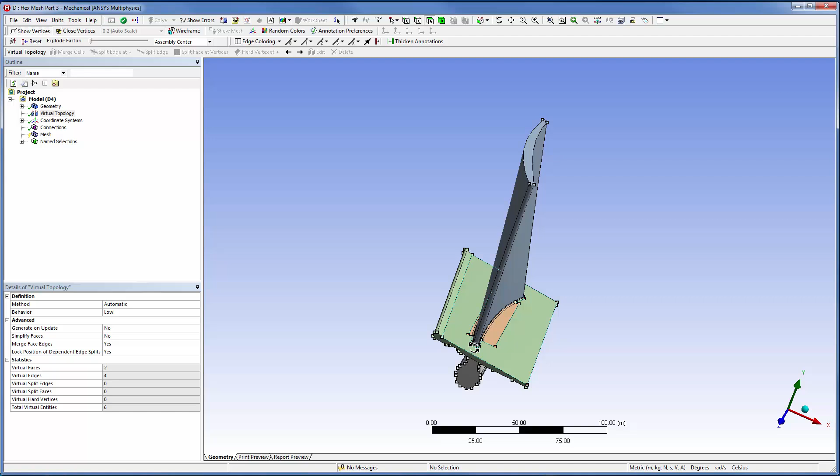There are some fillets on the plate surrounding the blade. When I decomposed the model, I sliced these fillets in half, but now I need to merge them with the adjacent faces on the plate. Doing so will help me get a good quality hex mesh.

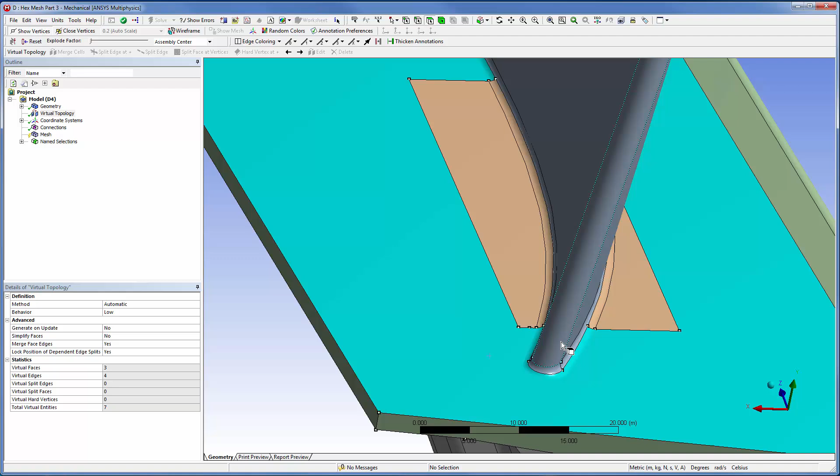The blade also has a couple of fillets, so I need to merge them with the adjacent faces.

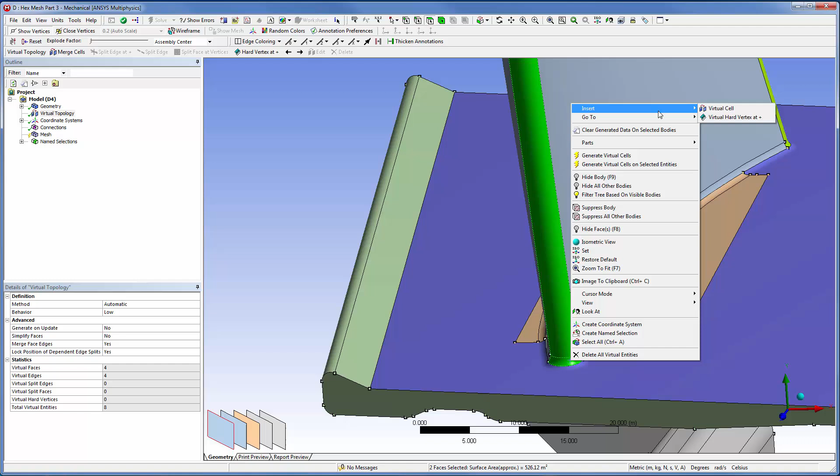Now I can clean up the fillets on the intersection region.

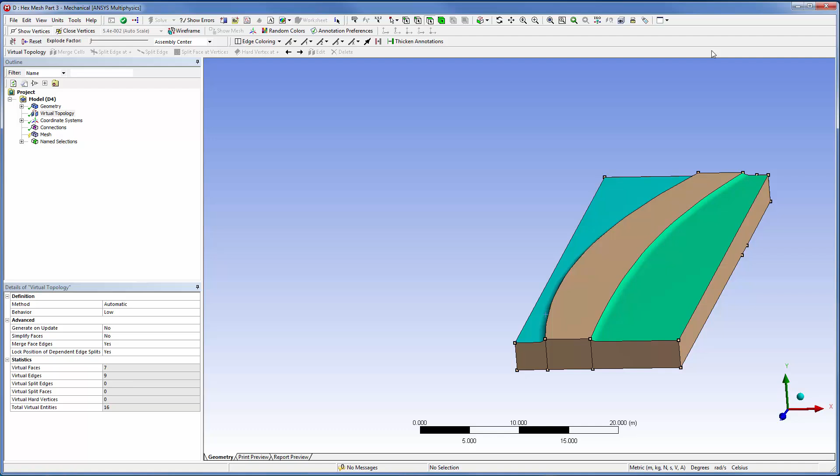There's a split on this face, so I'll merge the two faces into one. The faces were merged, but the edges on the bottom of the face are split. I'll insert a virtual cell to remove the split.

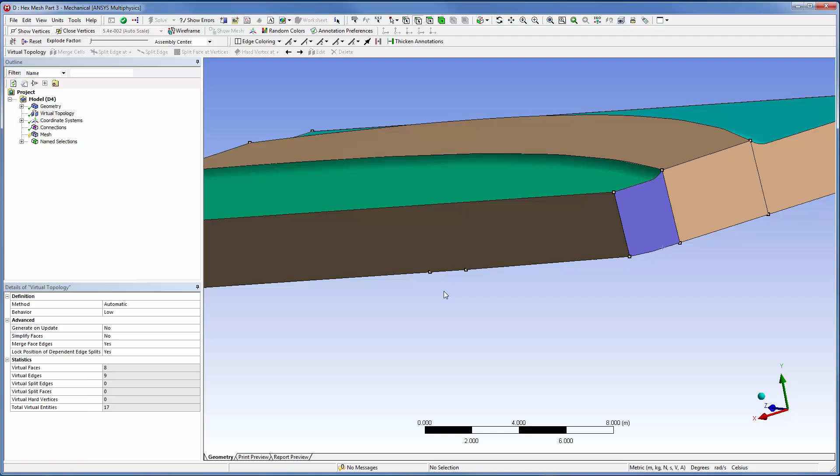There's another edge split on this side of the body. I'll insert a virtual cell to remove it.

If I show sweepable bodies, I see that this intersection region is still not sweepable, even though I've addressed all of the issues I could find. This indicates that there are one or more small edges and close vertices that are just too small to see.

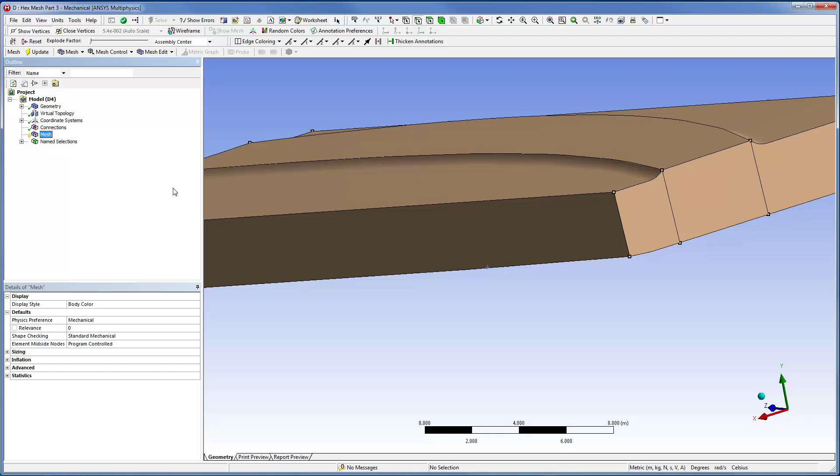I expected this issue because when I sliced the model during the decomposition, I observed that some edges would likely get split into very small segments due to tolerance issues with the geometry. I can identify any small segments by looking for close vertices.

There are two instances of close vertices. I'll inspect this area more closely to determine the cause of the issue.

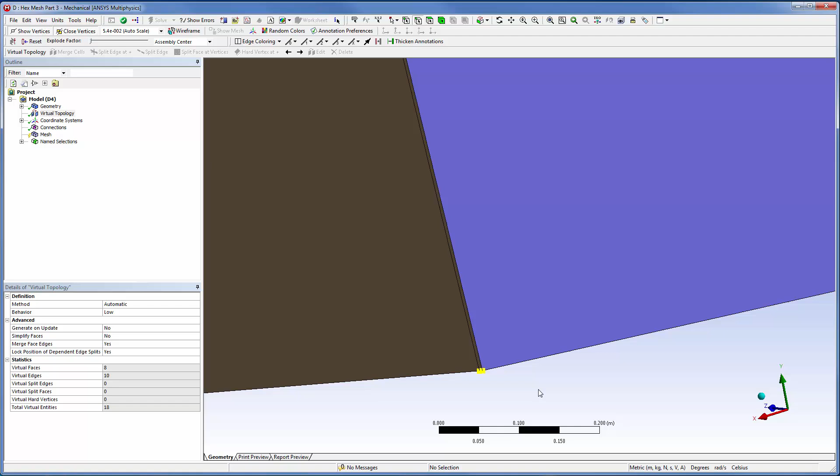What appear to be just one vertex is actually two vertices very close together. There's also a superfluous edge. To remove the extra edge and vertex, I'll merge the two faces.

Now I'll show all bodies and then show all sweepable bodies.

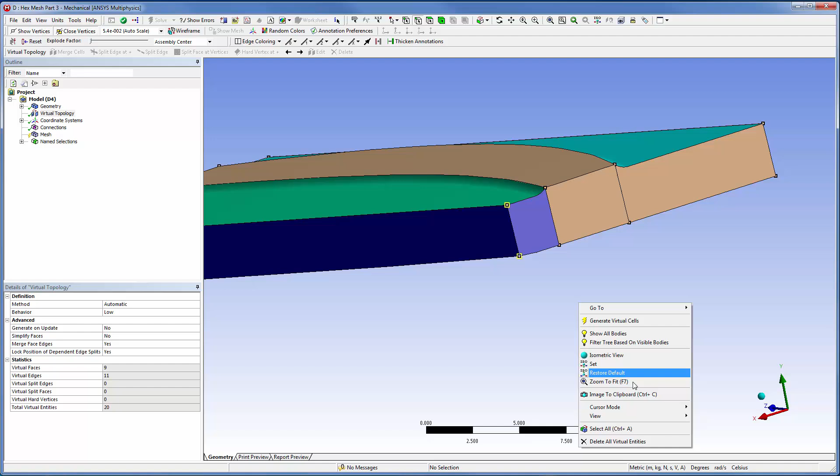I see that the intersection region is now sweepable. The blade and the plate are not sweepable, even after cleaning up the fillets. I'll need to use the multi-zone method to mesh them.

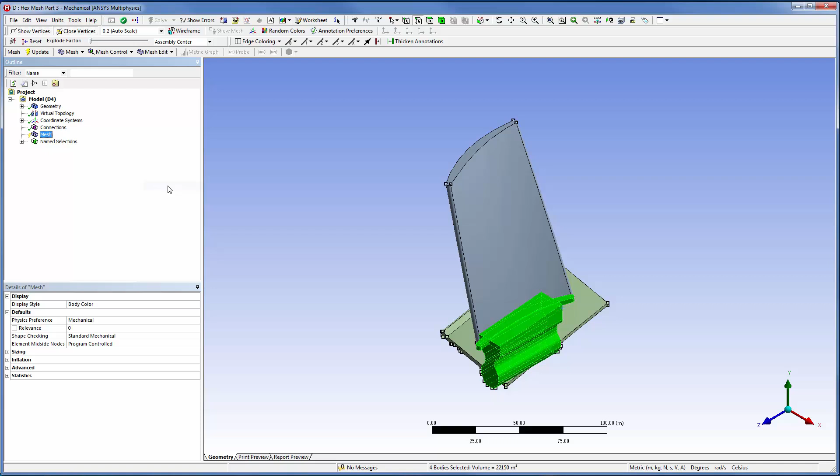This concludes part 3 of this video series. In part 4, I'll mesh the model using sweep and multi-zone methods.